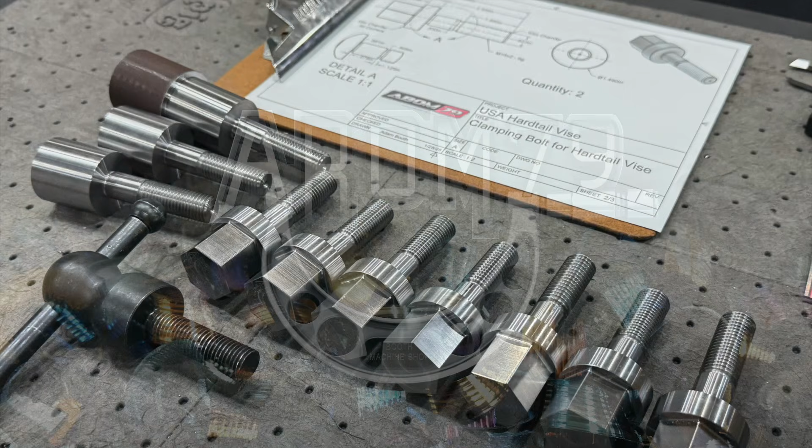We are in the new shop this week, and you can probably see that there's a little bit of change that's happened in here. We're going to talk about that. I want to give you guys some updates on things that's been going on around here, and things we're going to be looking forward to in the new year 2025.

I am also continuing to work on the USA made Hardtail Vise. Last week we were in the home shop using the shaper, working on the main vise body. And in that video, I had mentioned that I'm wanting to replace these guys right here - these are the factory clamp bolts that go into the Hardtail vise. And I'm working on my prototype replacements for these right here.

That's what I've been working on the past day or so, and I'm trying to get to a point where I feel comfortable with the program and making a good finished part before I move on to the actual finished product, which is what I want to get to. We're not going to be making the finished part in this video, but what I would like to share with you is the work that I've put into designing and machining the prototypes up to this point.

So I wanted to utilize my Miltronics CNC machines to make these for a couple different reasons. Every time I go into a part or a project like this, it's continuing my training with CAD and CAM, continuing my understanding, and each time I go in there and practice on Fusion 360, I learn a little bit more. And not only do I learn a little bit more, I remember things a little bit more each time. It's such a powerful software that there's so many things you can do with it. It's really hard to kind of go in there and just know all the capabilities of it.

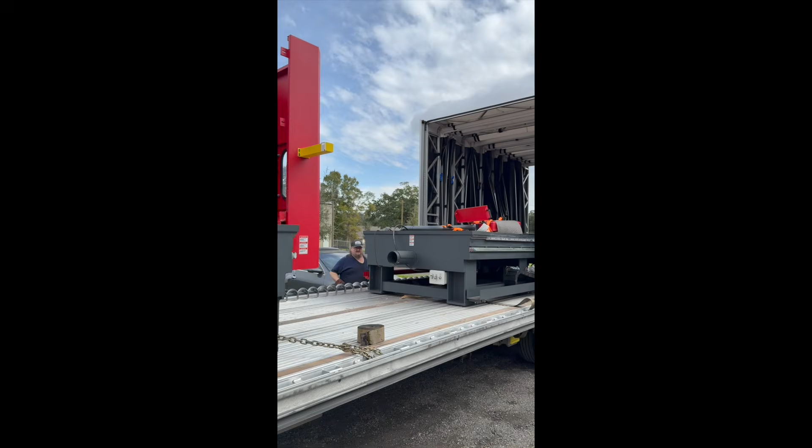But the cool thing is we're going to be replacing the Flex CNC with another machine. We're going to be putting another Flex in the shop, only this time instead of the 20-foot long bed, we're going to go with a 10-foot bed. That's going to clear up some floor space, which is a nice bonus since I'm limited on shop space, and the Flex is a big massive machine. It's really nice having that 20-foot bed if you've got work on full length materials, but I only had to use that a couple times for jobs over 10 feet, so I'm not really concerned about that.

So we're going to go with the 4-foot by 10-foot replacement machine. It'll probably sit in about the same place as the old machine. I requested the smaller coolant tank so it takes up a little less room on this end, which will give me more space back there where the forklift and other stuff is. I'll have space so I can hopefully add another machine in the future. I don't know what that machine will be yet, but I wanted the possibility of adding another mill or whatever. With the Flex that was in here, I just didn't have any more space except for maybe something small.

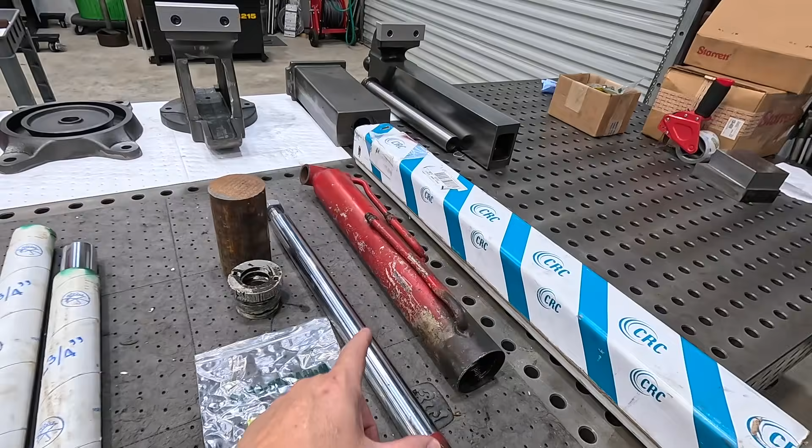All right, so I wanted to show you some upcoming work. We've got this hydraulic cylinder here in the shop - goes on a Mahindra tractor, for an outrigger. A couple things wrong with it: you have a rod gland that's completely chewed up, the threads are galled, coming out.

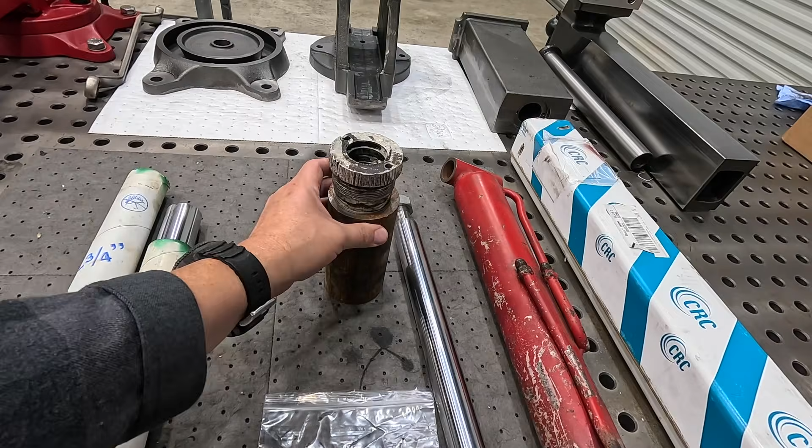So we're going to be replacing this, and I'm going to machine it from ductile iron instead of aluminum. We have some ductile for that, and I'm still waiting on the seals to come in - the material shipped, but they had to order one of the seals, so it should be here in another day or two. Once I have the rod gland machined and ready to go, we'll build it and put it back together. The barrel here - first thing we have to do is deal with that galled aluminum inside the threads, so we need to set this up in the lathe and chase those threads to clean them up, making sure our new gland screws into that barrel properly.

All right, so this is a job coming up. I did want to mention, because this is helpful, CRC Industries - luckily for me, they're local, over in Robertsdale, Alabama, less than an hour drive. They have all the materials for hydraulic cylinders, whether you need aluminum or ductile for pistons and rod glands, chrome plated rod, regular chrome rod, induction hard rod - they have all the honed ID tubing for pretty much any size hydraulic cylinder you can imagine. They have all the material, including all the soft parts you need, soft seals, everything.

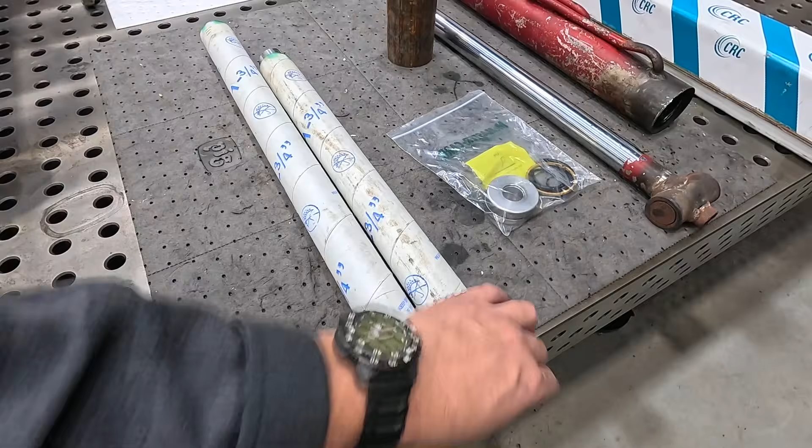They also sell drops - they have a drop shelf. These are a couple pieces I went ahead and added to the order because this is some really handy stuff to have around the shop. I use this a lot for projects and making parts, even customer parts. So if you guys need some material, this is 1045 steel - you can check with them because they have drops of all the different size rods they sell, and you can usually get it for a discount versus the regular cost of a full length rod. Good way to add some material if you need to in the shop. This is really good stuff to have. They had these two on the shelf, so I just added that to the order.

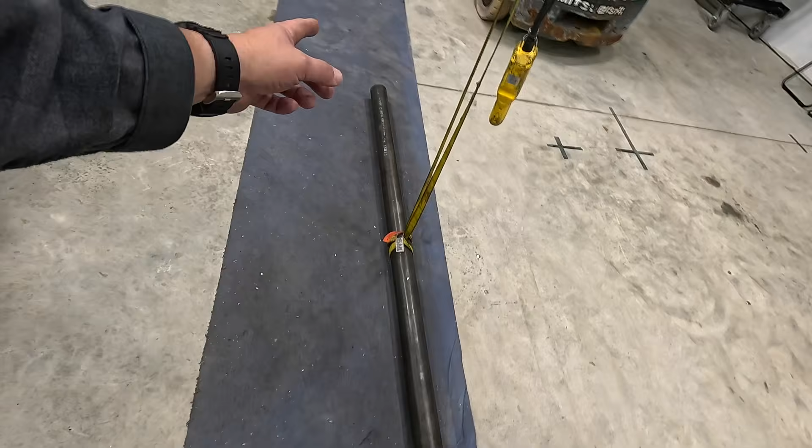This is going to be a mandrel for one of those paper cutting machines, and what we've got to do is turn it from end to end. There's a specific diameter it needs to be, and then each end is going to be turned and threaded for one of those bearing nuts, and the ends are counterbored for the bearing as well. They did provide a print for me to go on, so I have the dimensions there on an actual drawing provided by them. So this is going to be an upcoming project very soon.

We're probably going to get started on this next week, and we're going to be using the American Pacemaker to get this job done. So I figured you guys are going to like that—really nice manual lathe job right there.

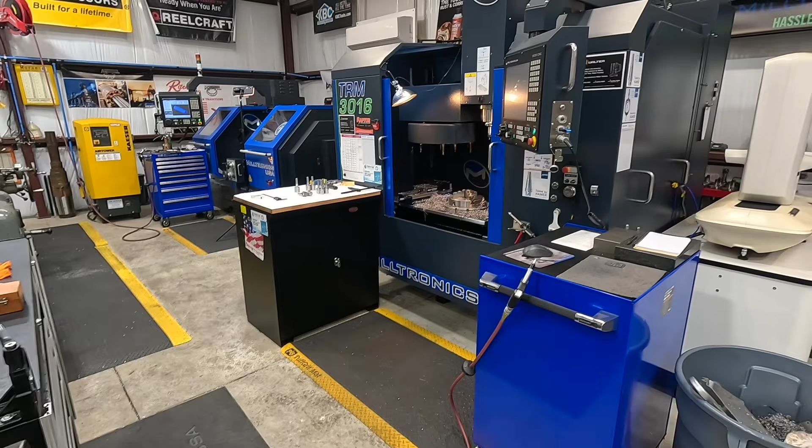All right, so we're going to move around here to the Miltronics. I have a little update I'd like to discuss with you on these guys as well. So about 3 years ago, when we first installed the Miltronics, I mentioned in that video that I partnered up with Miltronics.

They wanted to provide these machines, put them in the shop to help me and be a part of this journey of learning CNC and modern manufacturing. And that's exactly what they did, and they have been great to work with—just a great group of individuals up there at Miltronics, and I have absolutely enjoyed my partnership with them.

We are continuing that partnership, and what we're going to be doing is replacing the TRM 3016 with a VM 3018. So we're going to be going from a tool room mill to a full-on production mill, and I'm really excited about that. I have really enjoyed learning how to operate this mill right here, and this is an excellent machine for any machine shop out there, especially job shops like myself.

If you guys are running manual machines, manual mills, and you're looking to step into something that is fully enclosed with full CNC capabilities, this is an excellent mill—the TRM, the tool room mill. 30 by 16 is your travel there. But yeah, we're going to be replacing this with the 3018.

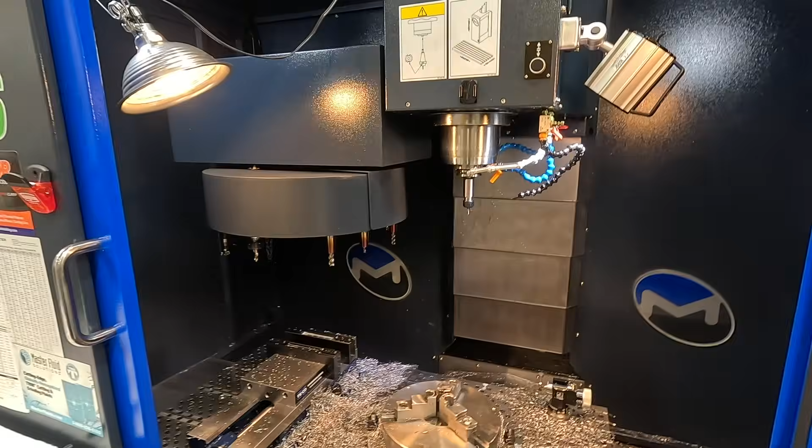That's going to allow me to have faster spindle speeds. We're going to have the side mount tool changer—I believe it holds 24 tools versus the 16 umbrella style. And because it's a full-on production machine, we'll have fast tool changes. It's got the swing arm tool change in there, and I believe a 10,000 RPM spindle.

It's going to have the through spindle coolant equipped with it. It will have the Renishaw probe, and it's going to have an auger on it as well. This one was not equipped with an auger, so I have to get in there and shovel all this out by hand. But the new one will have the chip auger, which I'm excited about, so we can turn that on to get the chips out of it.

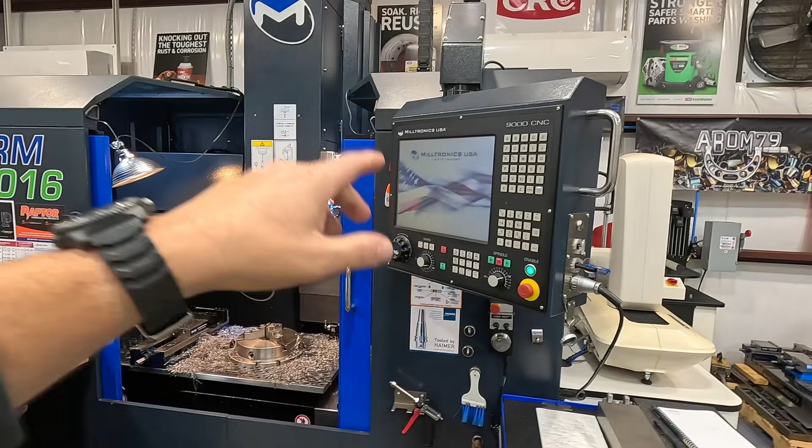The other cool thing about the new machine is that they have updated their controller. They just launched it last year at the IMTS show. Their new controller is called the Inspire, and the new machine is going to be equipped with the new software, the new controller. It's supposed to have a lot of benefits and updates, providing even better parts, better finishes, and more options on the controller and things like that. This is probably going to be later in the year as well, because they too have to build the machine—it's not ready yet.

We just talked about this recently and made the deal on it, and decided to go forward with it. So it could be March, April, May. I'm not really sure yet, but I'll let you guys know whenever that happens.

And this one is going to be going away, by the way. We're going to disconnect it and move it out of the way. It happened at a good time that the Flex is gone, because it's just going to make our job easier. We're going to move this one over and put the VM 3018 directly in its place right here. Then Milltronics is going to be taking this guy back.

What they told me is they're going to use this in one of their showrooms as a demo machine. So I am excited about that, and I'm looking forward to having the updated machining center in here to use, and hopefully that's going to help benefit me whenever I start working on these production parts, these ideas I have, to make something for you guys out there, a product that I can sell to you.

That's something I'm really excited about. All right, so I'm ready to jump into this project and show you where I'm at. I wanted to give y'all a demo of what I've been working on, getting this program and this part proven, and I think I have a good part now. Once I show this to you guys, I'm going to be moving on and hopefully making an actual finished part out of some different material. But let me show you where we're at with this, okay?

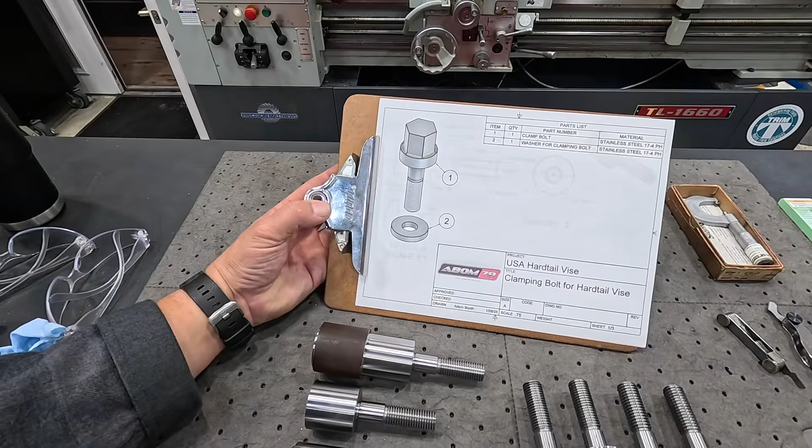So here's a few samples, and actually some finished parts right here. This is what I am making right here. I'm calling it the clamping bolt for the Hardtail Vise, and it is, again, going to be replacing this guy right here.

Now, there is absolutely nothing wrong with this. This is a good, solid design. Jason over at Fireball Tools has done an excellent job engineering this vise and all the parts he's put into it. So there's nothing wrong with a telescoping handle, okay?

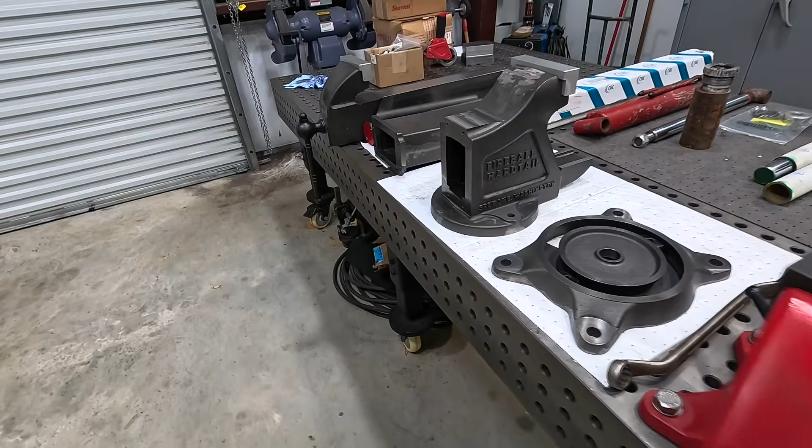What I was trying to do, what I would like to do, is continue making this vise right here a little more unique, a little bit more my own. This one is the Made in USA version.

Jason has somebody in the USA casting these and building them, and these are going to be available hopefully pretty soon on the website, where people can purchase them. But a while back, he sent me the castings for the USA made version so that I could machine it myself and put it together.

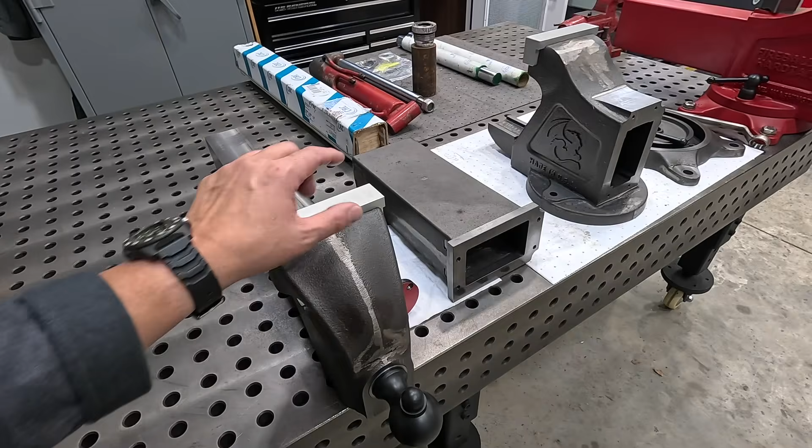And let me tell you, there's a lot of work that goes into machining these parts. I've got a whole playlist on the channel if you guys haven't seen it, machining every one of these castings so that it fits together.

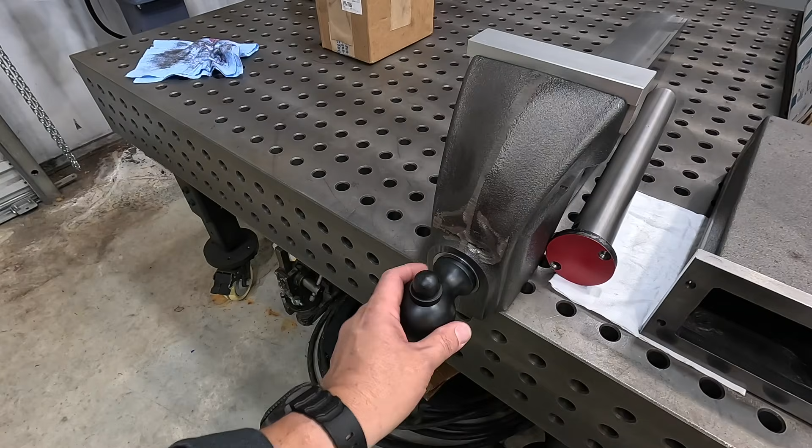But some extra things that I want to do to this vise: for one, we're going to be making our own clamping bolts, these guys right here. The other thing I would like to do is machine our own spindle, okay? We're going to just make our own spindle.

That's going to be some really good manual machine work. It's going to be good manual and CNC work, because I would like to replicate the meatball handle here on the end of the spindle, and I'd like to use the Milltronics to machine this part right here. But the Acme part of it, the thread, is going to be done on the manual lathe.

So this is going to be replaced. We're going to be replacing this guy right here. This is the nut. All right, so we're going to have a new nut to match the new threads that we're going to be putting on that spindle.

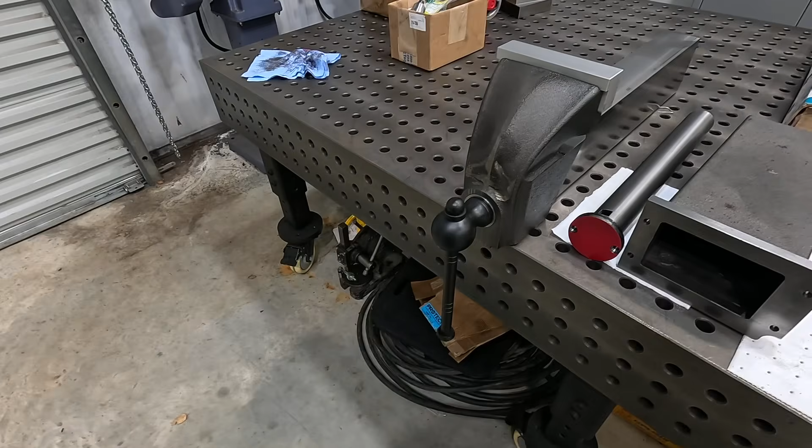So that's two big projects. And the other one was this guy right here. I want a hex head bolt on this that you can use a wrench to loosen and tighten. It's just personal preference, and that's what I'm going to be going with.

All right, let's go ahead and jump into our machining project for this week. And we'll start with the prints here. So these are some prints that I designed in Fusion 360.

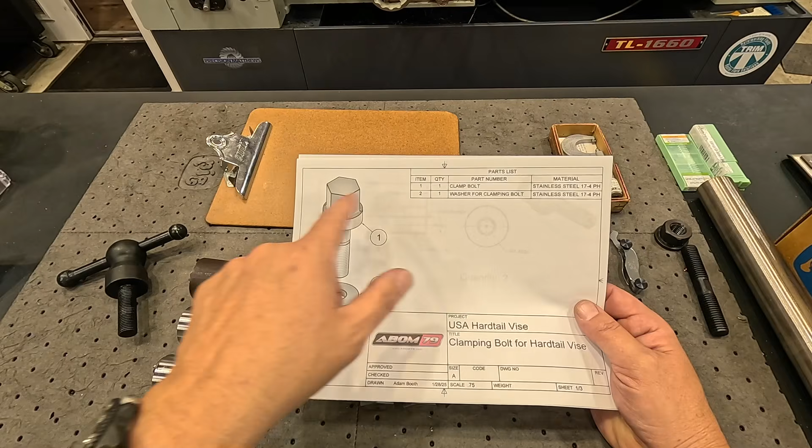I had a really good session with Kevin over at mechanicaladvantage.com, and he showed me some new techniques I hadn't seen before, where your first page is basically the part you're making, item 1 and item 2, the part number, material. So the finished part, once I make it, I'm planning on making mine out of stainless steel.

We're going to be using 17-4 precipitation hardened stainless steel. That's my personal preference, that's what I want to go on my USA Hardtail vise. We'll get into that kind of stuff later on, but for our prototype we're going to be using steel. So there was the first page.

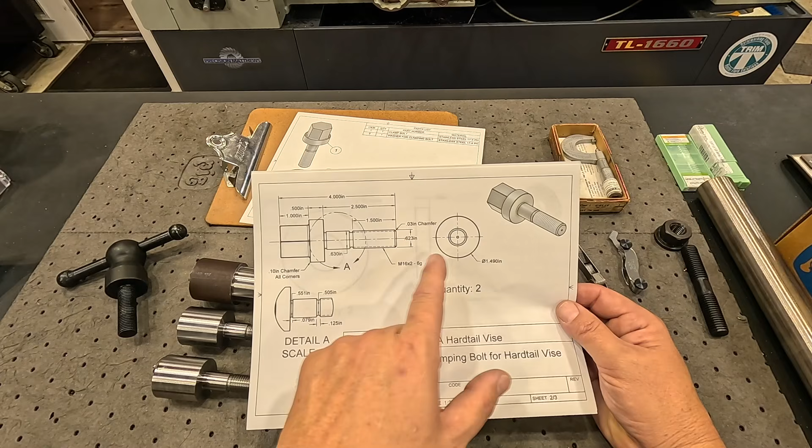There is the second print showing the specifics, mainly for the lathe work, and what it'll look like. This is metric, we got a metric thread, by the way, M16 by 2. And then we've got groove detail right there for the undercuts that I want to put in.

This is simply the washer that I want to go with it, a quarter inch thick, 16 millimeter bore, 1.5 inch OD, using the same material that we're going to be using to machine these. So there's our 3 prints right there on what we're going to be making.

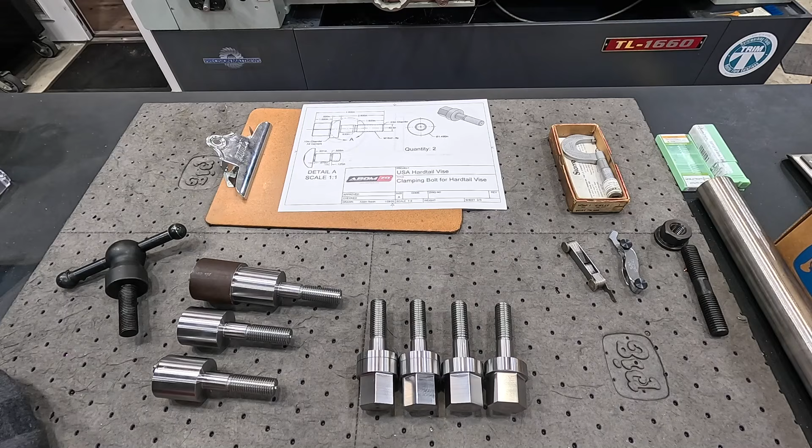These are the prototypes I've been working on, and the reason I have so many is because it's difficult to just make one part over on the CNC. It's not difficult to make the part, but whenever you're trying to tweak your program, if you have to make changes on diameters, finishes, maybe something's cut in the wrong place, it's better to just go ahead and make another one, or have another piece you can put in the machine and turn and mill another one.

And that's what I've been doing. I've got some more over there, and once I got things dialed in to where I want, it was real easy just to keep going and keep making a few more parts so I would have some extras to put in the machine and work on. So that's exactly what I'm doing.

These were the first 2 that I machined right here. Now the threads on these guys I did over on the Precision Matthews lathe. I did this manually - turned it, put the thread relief in there, threaded it. But I did something that I've always taught you guys.

I did something I've tried to correct other people in doing - I went ahead and took this bolt right here, the regular clamping bolt, and I don't have my calipers. Let me go grab them. All right, I had the calipers over on the machine.

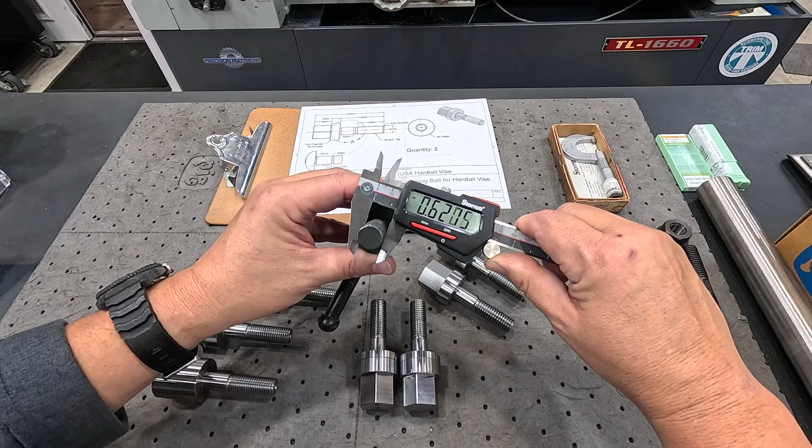So what I was getting at was, whenever I took these out of the vise, I've always looked at that and just figured that's 5/8. You can just look at it and kind of tell the size. And when I measured it, let me show you - you're getting 621, sometimes you get 620, just depending on where you measure it at. And I took that and said, okay, that's 5/8. That's all I did.

I've always taught you guys to verify your thread pitch using a thread pitch gauge right here, okay? I never did that - I assumed that was 5/8. I went ahead and turned my very first one, actually turned 2 of them, turned and threaded for 5/8-11 UNC. Beautiful threads, right on size.

We got a 5/8 flange nut right there, you can see, goes on there nice. But I never could get it to screw into the nuts over on the vise. After a couple tries, even chasing the thread and taking a couple thou off the pitch diameter, it still wouldn't go. I said, I think I know what's going on. I went ahead and grabbed the thread pitch gauge on the 11, and it doesn't fit. So what does that tell you?

You have a metric thread. So 2.0 fits on there right. So I made a mistake and turned these 5/8 when they should have been turned 16 by 2. All right, so another learning lesson right there.

I've told you guys plenty of times, always verify your thread pitch whenever you're machining these on a lathe before you make a part. Now this is no big deal for me because this is just a prototype, a sample part. But if you did this to a customer part, you're eating your labor and material costs and all that kind of stuff. So just prevent that by having these inexpensive tools in your toolbox and verifying your thread pitch. All right, there's today's lesson anyway.

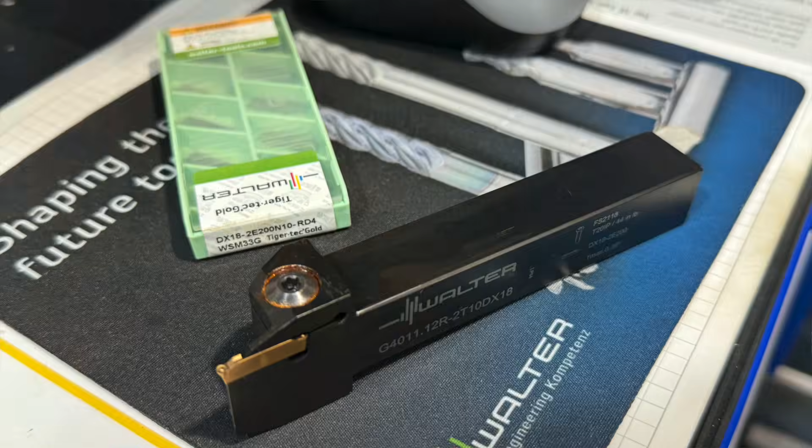I also added the corner radius down in here. I didn't have the tool that I needed for the CNC lathe, so I went ahead and got one from Walter, and it's a 2 millimeter wide full nose radius insert. So I was able to modify it.

You can see this one right here does not have the corner radius down in there. So I made several of them without the corner radius, and then once I got that tool installed, I was able to add that to the program and get it proven so that we didn't run into this face right here and cut that little undercut on there as well.

All right, so that's where we're at. And then once it's turned into this part right here, then I go to the CNC mill, drop it in our 3-jaw chuck, and I've got a program where it's going to machine the hex. It's going to deck the top of it, chamfer it, engrave my logo, and it's pretty much a finished part at that point right there.

All right, so I think that about covers everything. I will go ahead and screw one of these in so you can see what this looks like compared to the factory handle. And then let's cut a couple more of these guys and show you how the program is working on the CNC machines.

All right, want to show you what these are going to look like. So we're on our hardtail, and just so everyone's aware, this is the made in Taiwan version of the Hardtail Vise, okay? Where that one is the made in USA castings that we've been working on. So if you guys buy one, this is what you're going to get right now, okay?

And absolutely nothing wrong with anything on this vise right here. Fireball Tools has some excellent videos on their YouTube and their website showing the torture test that they put this vise through compared to other well-known vises like Wilton, Reed, and all the other popular ones out there, and how well these guys perform under the stress loads.

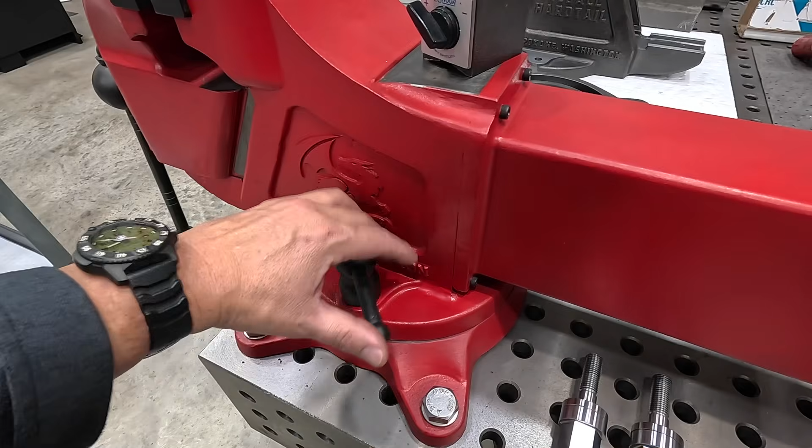All right, so here is the original handle. Takes a little bit to unscrew it. Let's go ahead and pull this one out. All right, that one out. And we take one of our samples.

Just like that right there. See, I went with stainless steel bolts, and I wanted this to be stainless steel as well, just to give it a really interesting contrast. I personally like it, it's just a personal preference, guys. Just like these bolts here on mine, the USA version, these are stainless back here. But that's it, that is what I'm going for right there. I like it, I think it looks good, and this is what we're gonna have on our USA casting right there.

So let's go to the machines. We're gonna start with the lathe work, and then we'll get those turned, and then we'll go to the milling machine and mill the hex. This is that material I've been using to make the sample parts, just some cold rolled 1018 steel that my friend Blake gave me a bunch of. I'm gonna go ahead and take this and cut it in half so it's not as long, and we'll be using this to make some more sample parts.

All right, we're ready to go into the ML16 with our stock, and got all the tools loaded up. Everything is on size, I've got everything working really well, and we're gonna be using our tailstock for this job as well. I didn't want to do any turning and threading on that 16 millimeter shank without any kind of support. It's just too much stick out there, and I think we need the support of the live center.

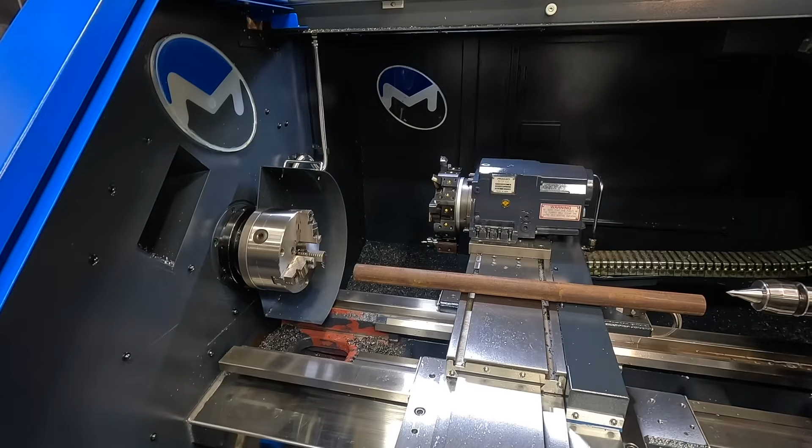As I mentioned, going in here and doing this work over and over again, repetitive, is continuing to teach me and improve how to use these machines and what I need to do. For example, the tailstock, I've got this really nice extended nose live center, and I've got the quill almost all the way out, 5.5 inches, and that's what it takes to clear this carriage and make sure our tools and everything clear there as well. So let's get this loaded up and start making some chips.

Bandsaw cut side, I want to make sure I started with that.

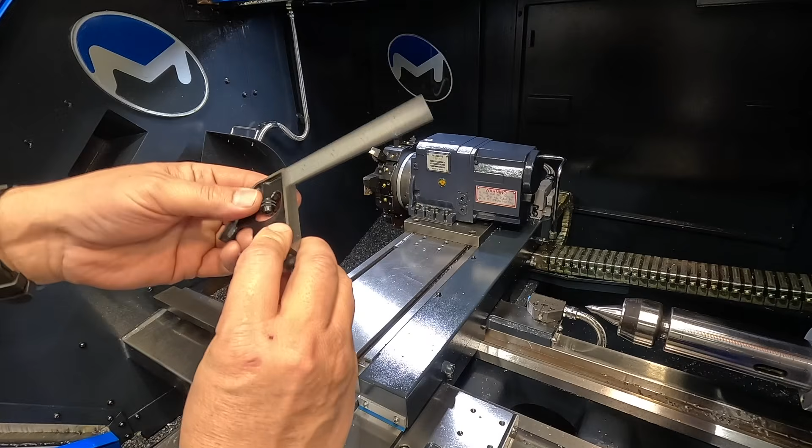All right, so to get my Z0 position, I'm using my Starrett small combination square. I've got it set to where I need to, and I just come up here and do this with the stock and get it nicely butted up to the square and the first face of that jaw right here. Once I have that, I tighten it up and it's where it needs to be, and it'll face off 10 to 15 thousandths, depending on how far out that is from where I tighten it up at. I usually just do another check with it, and I can tell you got a few thousandths clearance between the rule and the jaw, so it's going to take probably 15 thousandths off that face to start. We'll start you out with the wide angle there.

I will get in here to get you some better detailed shots of the cut, but let's just start here. So, order of operations: face it, center drill it. We'll stop the program, I'm going to bring the tailstock up to support it, and then we'll continue on the program. It'll be rough turned, it'll be finish turned. I have two separate grooving tools to put the thread relief undercut and the shoulder undercut in there, two separate tools to do that. Then thread it, and the last thing is the parting tool to part it off. Once it parts down to the small nub, we'll come in here, move the tailstock, reach in here and break it off, okay? Close the guard, and we are ready to hit cycle start.

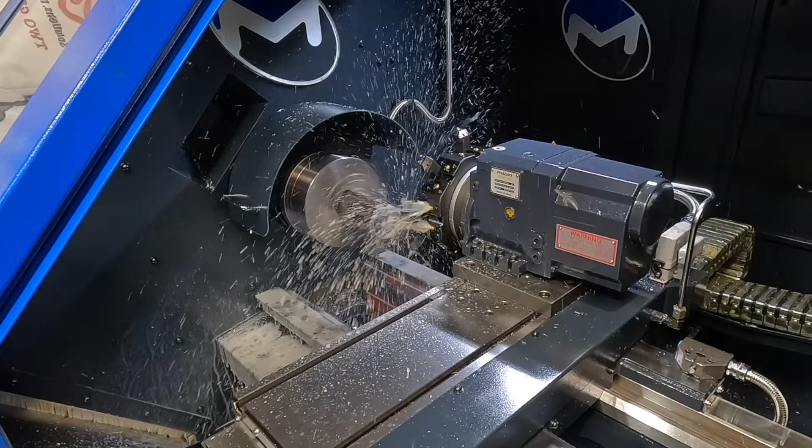I usually bring it in nice and slow just to make sure that I am in the right Z position. Face it. All right, I got an optional stop going. It's going to be our center drill. I'm using a peck cycle on that center drill just to take it nice and easy, make sure it doesn't come in there and just snap the tip of that center drill off.

All right, so this is where what I've got to do is I'm going to go cycle start to go to the next. It's going to bring our turning tool back up. What I've got to do is let it do the tool change and then bring this carriage back up to where it needs to start cutting before I can bring the tailstock in. Otherwise, this is too far back.

So I just bring it in nice and slow. And then right there, where it's going to come in to start cutting, I stop the spindle. Then I'm going to reach back here. I've got it pushed way back. Let me come around here, and I got to come from the back side. Push this forward. All right, this is the kind of stuff that all made me super nervous going into this job. When you're cutting down to a small diameter like that, I keep feeling like this right here is all going to hit. But I've learned that there is clearance here. It's not going to hit the tool turret. All right, so we come up here.

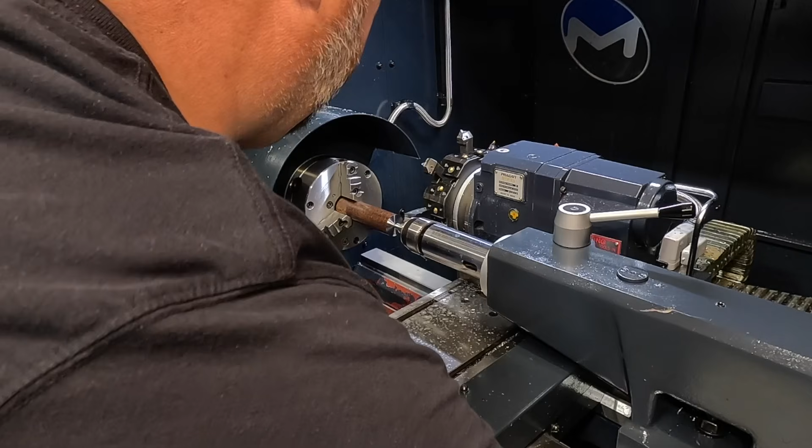All right, lock it in the back. And I don't put a ton of pressure on this. Matter of fact, I back off and I just run it in with the hand wheel just until it touches, lock it, and now we're ready to continue on.

So all I have to do at this point is just turn on the spindle again, forward direction, turn back on the coolant, and then the rapid button, I've got it down on 0. We're going to go up to 100%. Now it's going to start roughing it in.

So I do have the max RPM for the turning set at 3,000 RPM. I'm not comfortable spinning this thing up super fast, so I kind of limit it to 3,000. When I'm doing the grooving, I've got it set to 1,000 RPM. These chips are flying back here hitting me.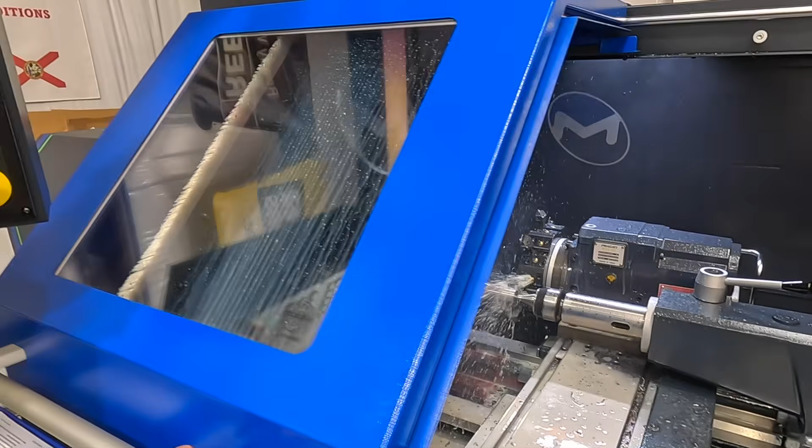And when I'm doing this roughing here, a lot of times I come up here, you can see our 3D image of it. I've been going up an extra 10% on the feed while it's just roughing that in. Slinging chips at me. And we got it maxed out at 3,000 RPM.

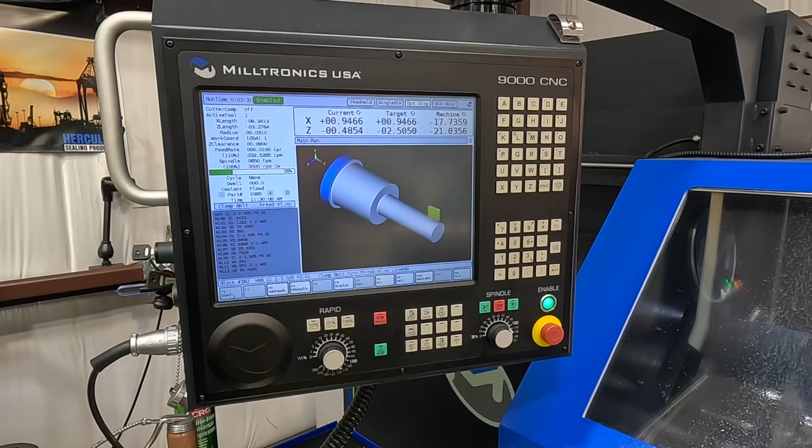All right, now that we're down underneath that 1-inch diameter, we'll bring this back down to the 100%. That's the last roughing pass. It's going to make one more roughing pass actually. Cut that chamfer and take the last few thou off of it. All right, here's your finish pass. Just taking 10 thousandths off of that, all of the diameters here, 5 thousandths off of the shoulder face.

All right, cycle start. Now we're going to be going to our groove. So the first one is going to be the undercut for the threads. Rough it out, finish it, chamfer both corners. Just that quick and easy, all right? That is a 3/32 wide full radius tool. The Walter MX22 is the tool.

All right, the next one, we're gonna be going to that new 2mm wide grooving tool so we can get into that shoulder. All right, I'm gonna slow this down 50%. You see that movement right there? That's what you have to sneak up on and get comfortable with it doing. Otherwise, you think it's just gonna crash and wreck and tear the machine up and tear your tools up, but it works. We've got a beautiful undercut in that corner right there.

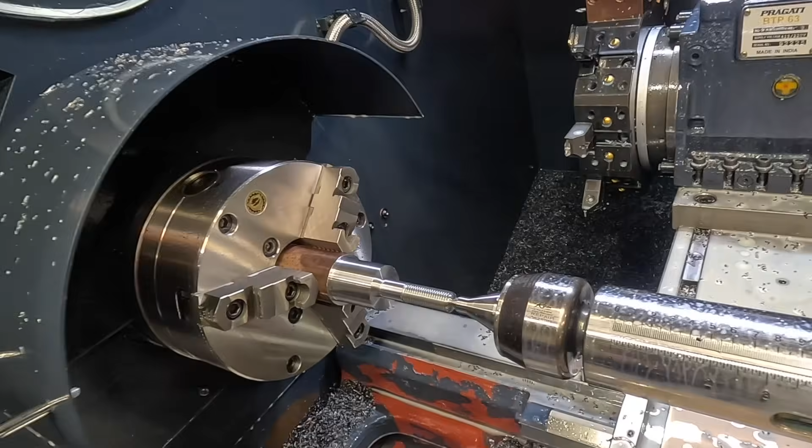Like I said, that 2mm wide grooving tool to get to that shoulder, I had to play with it because it was trying to hit the face. It was trying to cut the face. We made some changes to the program so that it didn't come straight in that way. It actually comes in from the side and cuts that out, and actually cuts a little bit of a chamfer on that too. So it was cool modifying it to get to just every little thing you can do to improve that is wonderful.

All right, so last thing we're going to do is do the parting tool, and hopefully it's going to work out the way I told you that it would. So let's start spindle, cycle start. We're going to this is our Tungaloy parting tool. I've got it going with a sort of a peck cycle also. It goes in 100 thousandths, breaks the chip, and then continues on. It just keeps doing that.

All right, and that's it. So that's the end of the cycle right there.

Everything looks good. We can go ahead and loosen our tailstock, slide this back out of the way. Now we come in here and break this off. This is a safety switch too, by the way - if that guard is open, there's a switch back there and it won't let the machine operate. Just a good safety feature.

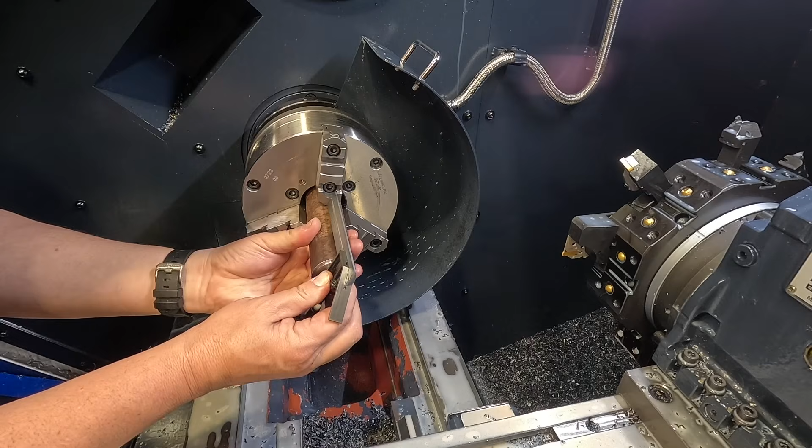Grab the combination square here and just try to get it close. Like that. Snug it, and then I check it just to be sure. That looks good right there. And then we'll retorque it. Close the guard, and we are ready to machine.

All right, face it off. And we're going to go to our center drill.

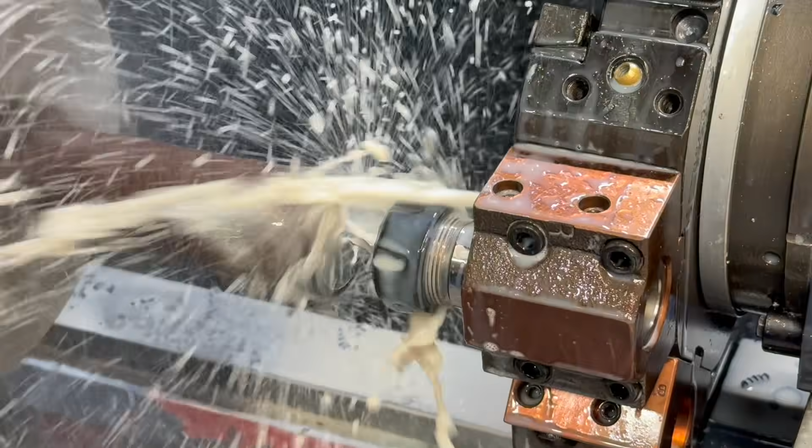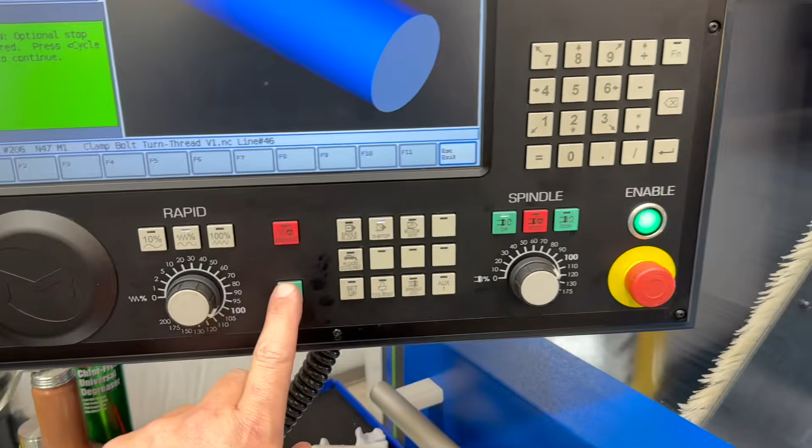All right, we need to go ahead - this is where we need to bring our turning tool around and bring it up to where we're going to start cutting. Right there. Bring it down to zero to stop it. Stop spindle. And now I'm just going to bring our tailstock in. Okay, our tailstock is in. We are ready to turn. First thing we'll do is just start spindle.

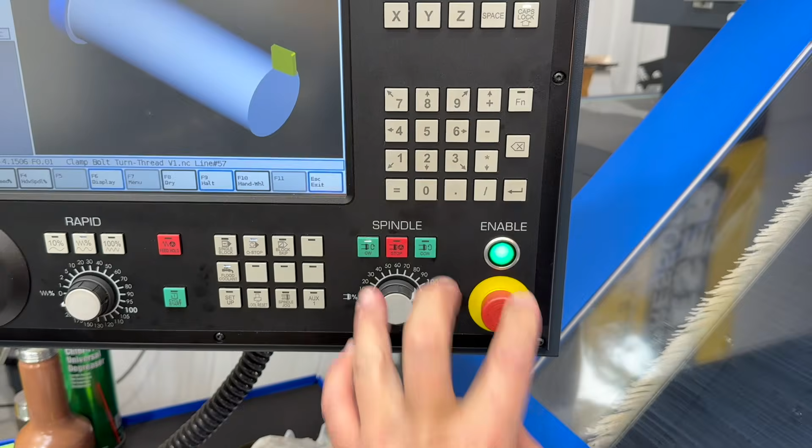And then bring our rapid up. It's slinging chips straight out this way, and they're like little hornets that hit you, so it's hard to get in here by hand to hold this.

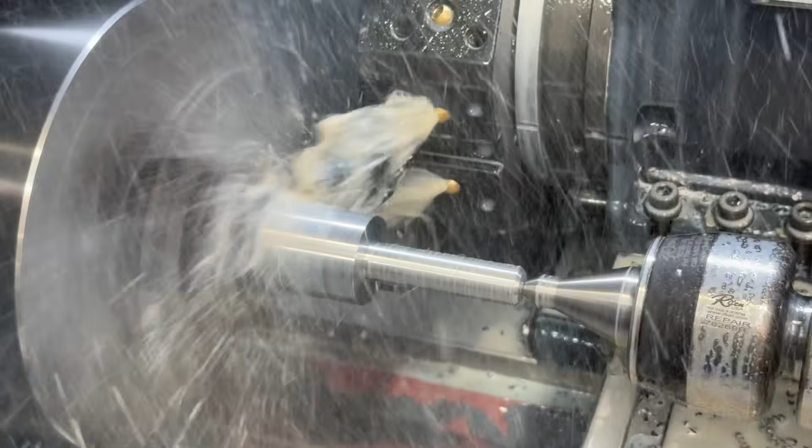Ready for a tool change and then go on to the grooves. All right, so for the next couple ops, I think I'm going to disengage the coolant so we can get in there and show you guys a little bit better detail of what it looks like. I'm also going to slow it down so you can see the movement of the tool.

All right, so let me go ahead and drop that down. Cycle start. Turn the coolant off. Let me slow this down. I'll tell you what.

So this is an adaptive grooving tool path that Kevin taught me about. It just comes in and goes like that. Whatever depth you have it set at, I think I have mine set at 15 thousandths per pass. Cut the groove, make a finish, and then it's going to chamfer it.

Chamfer. All right, now we're going to swap to our 2mm wide grooving tool. This one I'm going to slow down as well so you can see the approach. Up, coolant off. That groove cycle is going straight in, but it's like a peck. And it's going to chamfer the corner right here - just break that corner off.

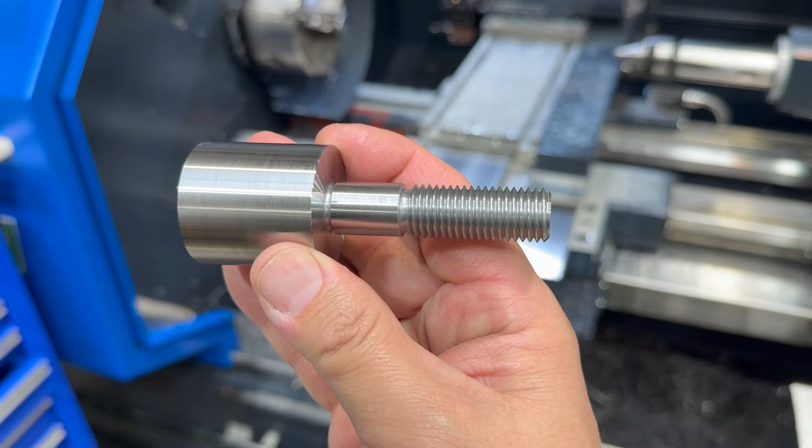I've made many changes on the program to try to improve every bit of this, from having a larger chamfer here on the end for the thread, better finish on the thread, breaking the corners for the grooves right there, and even on that shoulder, that little undercut in the shoulder, it was leaving a sharp burr there, and I was able to add a small chamfer pass to break that edge off, to eliminate having to do it manually with a file or something like that. But there we go. Now we are ready to take this to the CNC mill to finish it.

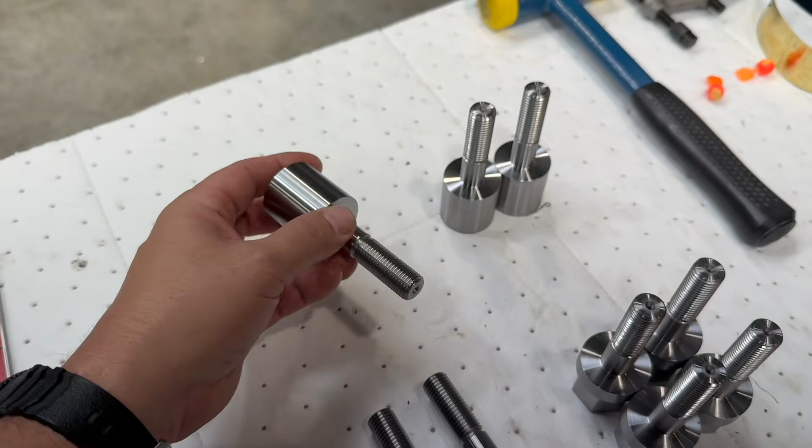All right, this is our setup for the milling machine. These are the two that we just turned, that you just saw me turn. These are some that I've already done previously, that I was working on the last couple of days. This one is one that's left where I actually, after I added the shoulder radius in there, the 2 millimeter wide groove, these two are what's left from before I added that shoulder groove in there.

You can see there's a burr hanging off that thread. That's another reason why I was reaching in there and filing it, just to kind of knock any of those burrs off while it's still in the lathe there. And these are some that we've already got milled and finished. You can see there's not a corner radius down in that bottom, and then these do. There's one that you can see how I touched the face with the grooving tool there.

So it's little tweaks like that that I'm always having to make. You know, if you do that and you mess a part up, it means you got to make another one, right? So that's why I make so many of them, because I make one and I make an adjustment as needed and then make another one. But it's, you know, it's just good. The material I'm using was free, and this has given me lots of training and practice, and it just helps me out. That one looks really nice right there.

All right, so let's go ahead and we'll get one loaded up and start our milling. Okay, into the mill we go.

So the top of this jaw is my Z0. So in the program, this face right here, we're working the top side of that. So I just drop it in, make sure the chips are off of it, drop it in, snug the 3-jaw up. It doesn't have to be super tight. I take the soft blow and give it one good tap like that, and now we are ready to machine.

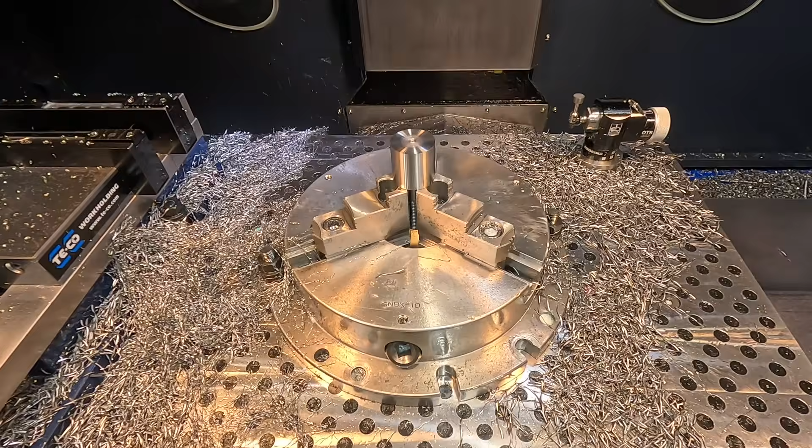All right, let's get going. We'll start off with a nice wide shot so we can kind of discuss things and see what's happening as we do it. Cycle start. We'll do a tool change to tool number 4, which is going to be our 4-flute 1/2-inch end mill.

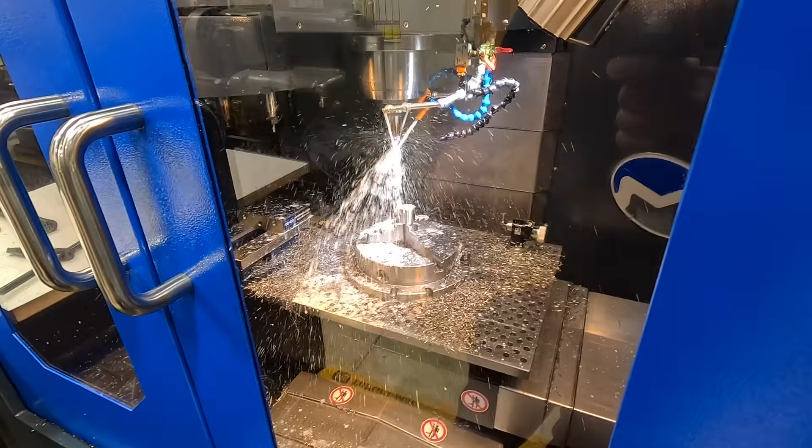Going to go around it. We got some really nice graphics up here so you can see what's happening. Cut it round, then it's going to come back and do the adaptive for the hex.

This is going to be the finish pass here.

All right, what I've been doing, see those chips build up? I've been turning the air on. It's helping to blow those out of the way. See that? It's basically just making a spring pass there.

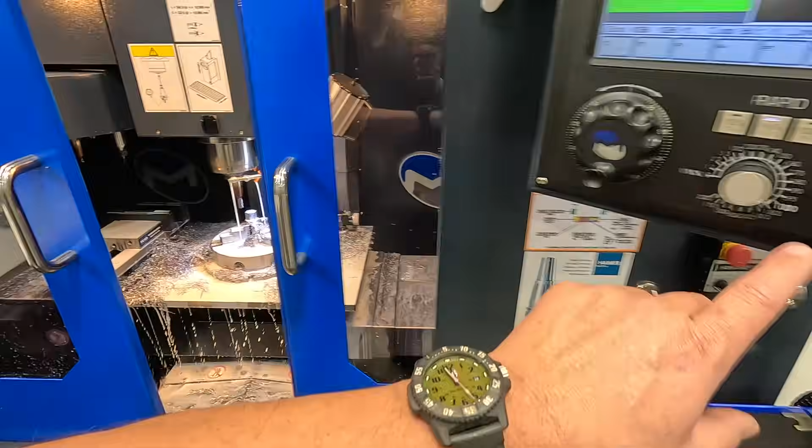All right, we're going to do a tool change to our TungForce-Rec end mill. There you go, that guy right there, 1/2 inch diameter, 3 inserts.

That's it, it's finished. Let's see if you guys can see this. I'm just gonna stop the spindle there before we continue on. Just got a beautiful finish on the top of that using that end mill there. After this one, I'll get you some tighter shots with my other camera.

1/4 inch diameter chamfer mill. Got a 10 thou chamfer on the top.

All right, and then now we're going to go to our engraving tool. That's this guy right there. Running 8,000 RPM, which is maxed out on the TRM. I am going to be running air with that.

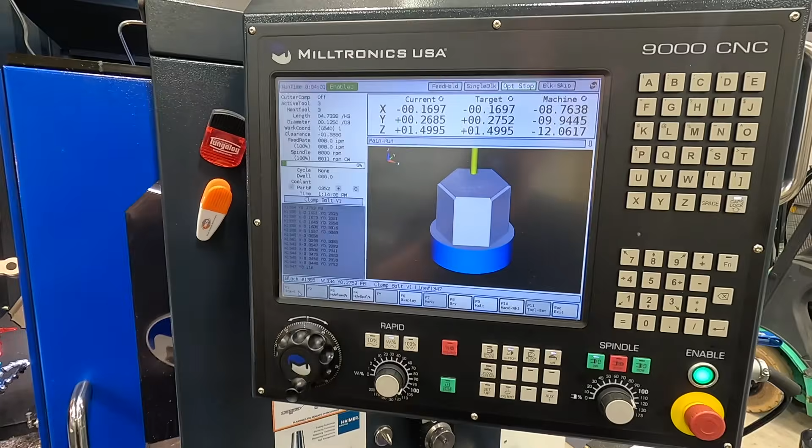You can kind of see it on the graphic stuff here. Let's see if we can tilt this down a little bit. It's just really hard to see, but the chamfer tool isn't defined very well. That's why it kind of looks a little goofy on the graphics there.

Should be just about towards the end. All right, there it is right there. There it is. I love it.

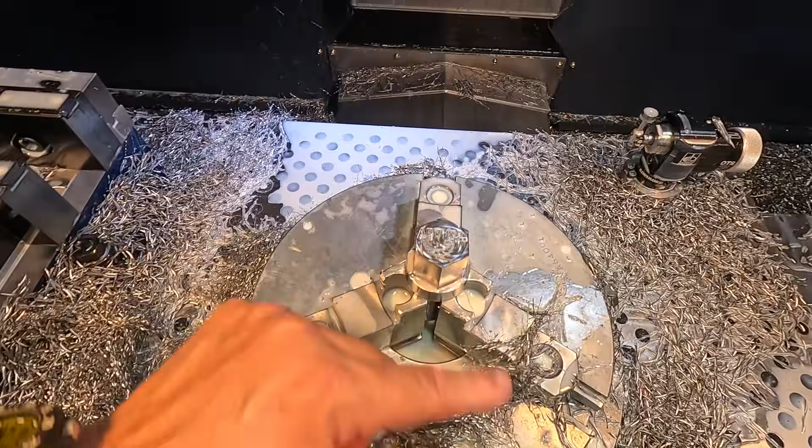Beautiful. I'm excited to see what these machine finishes are going to look like on something better, like our stainless steel, or maybe even a piece of 4140. But I think that looks great right there.

So just like on the lathe, you know, it took several of these to get this right. I would make a finish on there, and I didn't like it. On some of them, all I would do is just bring the Z coordinate down about 5 thousandths and recut it until I was getting the consistency that I wanted with both the facing tool and the grooving tool there. And I've got it to where I think it looks really good.

So we'll go ahead and take it out. And that is a finished part, with the exception of one chamfer that we still need to put on it.

That's this guy right here. I just do not have a tool. I don't have the proper tool here that I need to be able to get down there and chamfer that edge. So that might be something that we improve on later.

But for now, I'm just going to put this in the manual lathe, and I'll have a tool and come up and just knock that edge off about 10 thousandths.

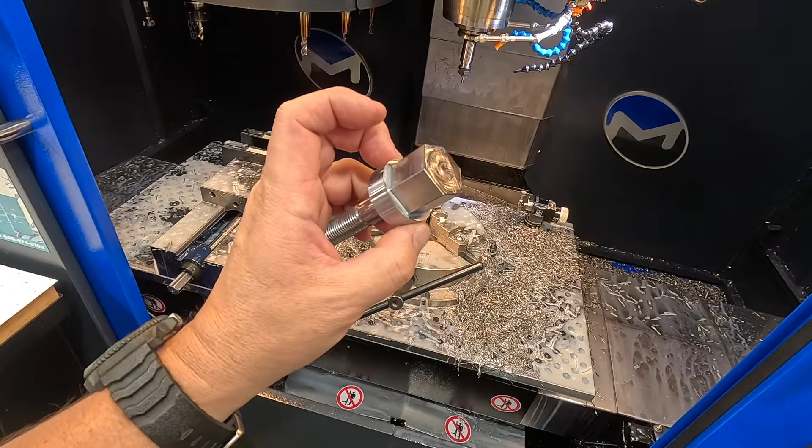But there we go. So we've got, this is the other one that we just turned. So we'll go ahead and get the chips wiped off of here, get it loaded up, get it machined, and see if I can get you some better footage of the next one. We are loaded and ready to start.

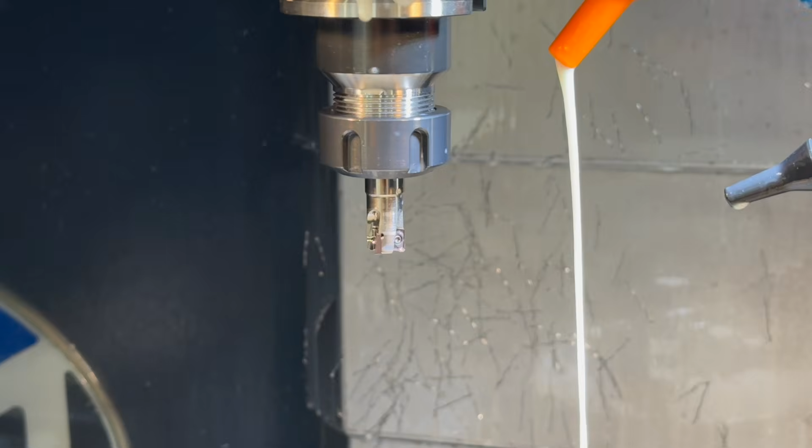A little better look at that finish up there.

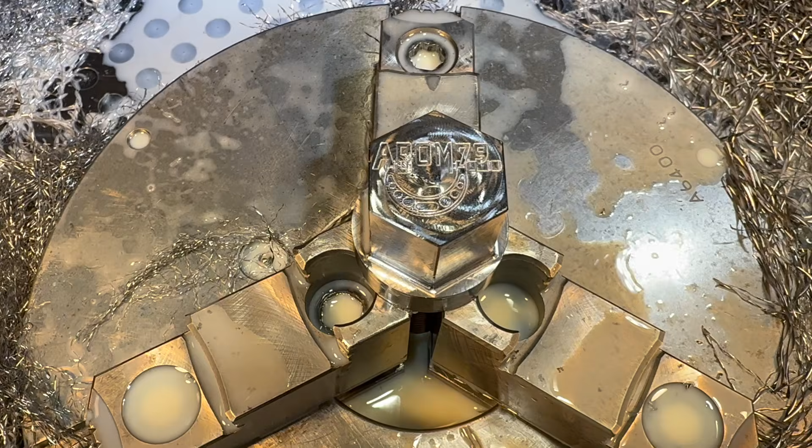All right, well, there it is. Is it gonna focus? What do you guys think?

So one thing that, you know, anytime you're taking, I hate how that camera does that. It tries to jump from one thing to another, and I wish it wouldn't do that. But one thing that I've learned a long time ago is that the pictures and videos on a freshly machined surface like that can really skew it and make it look worse than it really is. I mean, that's actually a beautiful finish on there, but some people may look at that and say, I don't think so, but it really is. That is a nice finish on there. It's got a nice slick, smooth feel to it, and I liked our depth in the engraving. Worked out good.

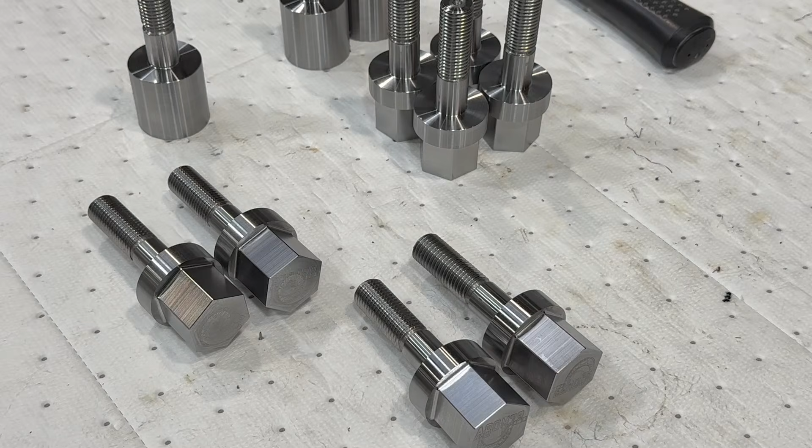All right, so these are the two that we just machined right here. You can barely see the chuck marks on there, but that is on there. As I said, we do need to come and cut a chamfer on that edge right there, and we'll do that last. But I really like that. I think the TungForce-Rec is leaving a nice finish on there, and our engraving tool is doing a really good job. Here's the second one right here.

Well, there we have it. Remember, these are being machined out of some 1018 steel, soft gummy steel. So it's going to be nice to actually machine in some good hardened material and see how much better we can get these to look. All right, there's those two there. So I still have some of these others that haven't been machined yet. So I think I'd like to go ahead and put one more in there and see if we can get one more good cycle of videos of the machining of the hex on one, okay?

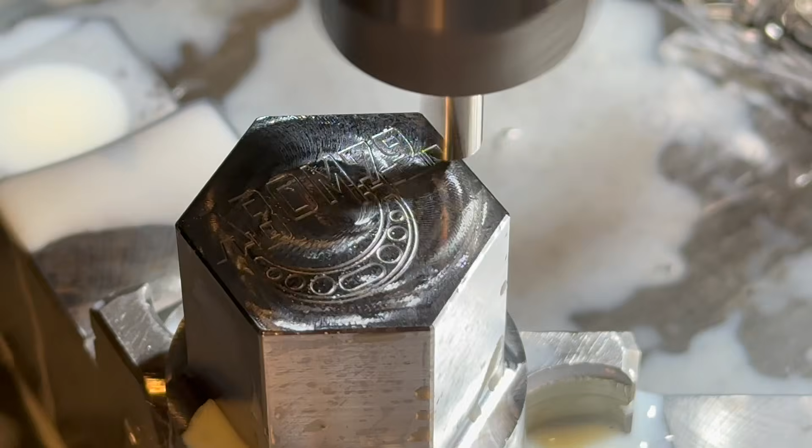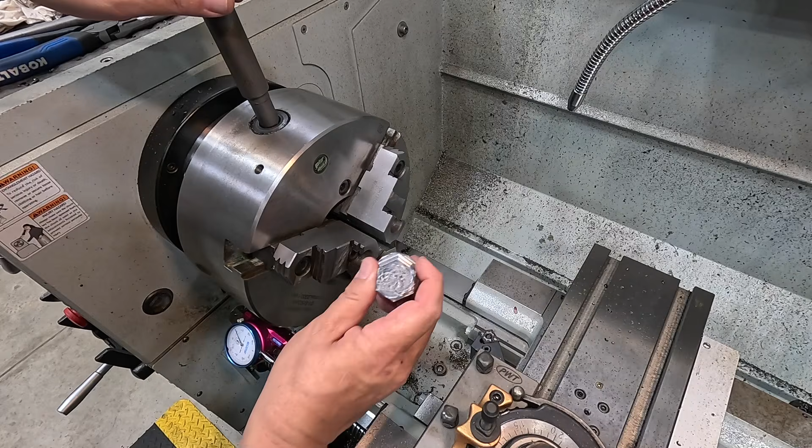All right, now that we've got all the CNC machining done, we're set up on the manual lathe here just for this last step of breaking this corner off. I got a 10 thousandths chamfer I'd like to put on that. So this is my setup right here. We're using the CNMG tool. We're using the 100-degree corner, should I say. Pretty simple. And I got a dial indicator down here set to a 0 where it first touches.

So just bring it into the face, clamp it lightly, and we'll turn it on. Tool shouldn't hit, tip of the tool anyway. I was trying to get as far as I could. All right, and then got this indicator down here. Once it touches that edge, it should be right there on 0. So bring it up, and it should be right there on it. And I just go another 10 or 12 thou, just like that. Don't move the cross slide, just bring it back.

Careful taking it out, and then there's your corner break on it. Simple as that. So I got the 3 that you just saw me machine, and I got 2 more over here that I haven't chamfered yet, so we'll do 5 of them.

I have the DRO set to a 0 in our X, so it shouldn't hit. So once you get in a rhythm here, if you got several of them, you can just bring it on up, chamfer it, move it back.

I would like to see if I can get this going in the CNC. I'm sure it's easily done. The pros that know how to do that stuff already probably have plenty of solutions for that, but this was just the simplest thing for me to do.

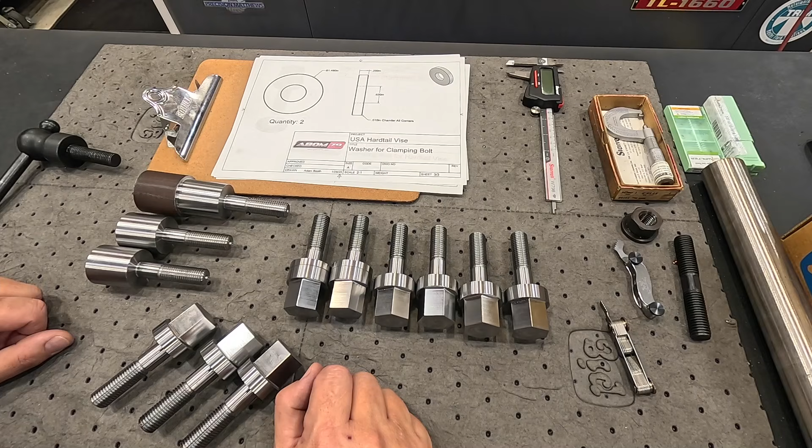So this right here, you know, we still need to machine some of those. I haven't even done a program for this one yet. The first 2 that I made, I just did it manually over there on the manual lathe. But I would like to work on writing a simple program to be able to do this over on the CNC lathe there as well. Get them face drilled, parted off, and then probably set them back up for a second op to face off the other side nice and clean. But that'll be a separate video project, whatever.

I've already got 2 of them made, as I said. These 2 right here. Got nice finishes on them. Got both sides faced off, 1/4 inch thick, matches the OD. So we'll take a couple of these that we just machined and go ahead and put them on there.

There we go. How about we go put them in the Hardtail Vise and see what they're going to look like.

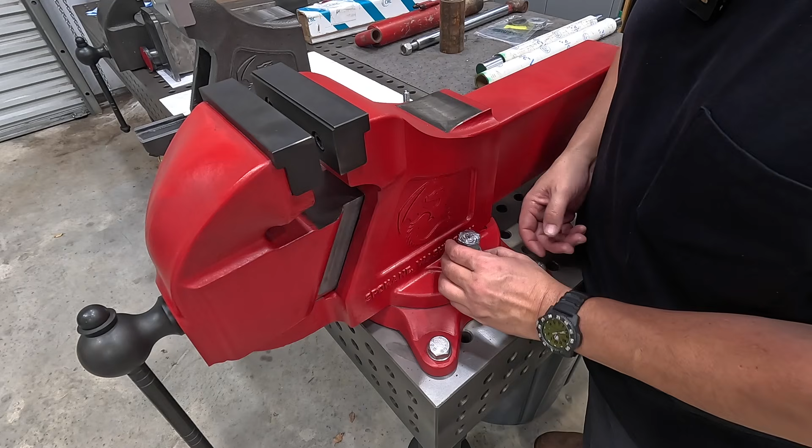We'll go in the finished Hardtail Vise right here so you guys can see what they're going to look like, because this is what I was talking about earlier, as in some things that I might consider machining or making and selling to other people. Once I get this program figured out and get the material to finish this, I'm going to use stainless for mine. We may end up making some pairs of these to sell to others if there's any interest, maybe consider a small batch of them or something like that.

But see, I like that. This is the look I was going for right there. I've got the stainless steel bolts holding it down to the table, and I wanted these stainless steel as well on my vise, so I'm liking that. Now the only issue with the engraving is that you never know where the orientation is going to end up after you get it on there, but no big deal. At least it's got my logo in there. Let's put one in the other side.

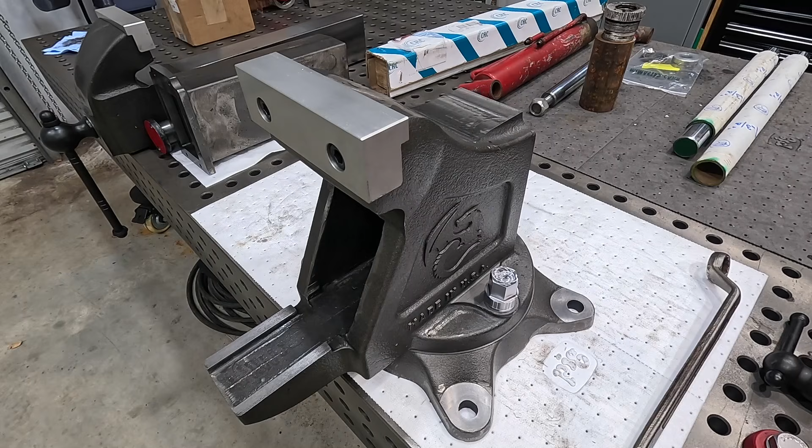So what do you guys think? You dig it, or would you rather have the original handle on there? I think it's just down to personal preference. I know that this is much more convenient. If you're in a fast-paced shop, a working shop where you're using a vise constantly all day, you may not want a wrench on there to loosen this up, you may just want to keep that on there.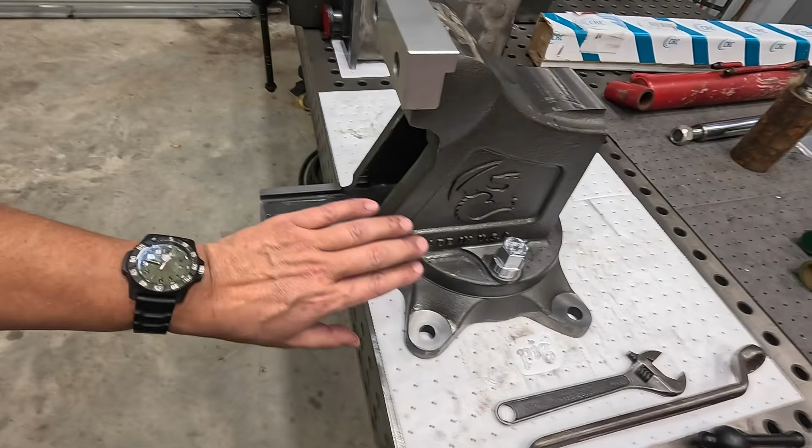But for me, for our special edition Hardtail vise, the USA version, we're going to be going with these machined from Abom79, only they're going to be 17-4 stainless steel. But I'm liking it, really do like that look. So real happy with the outcome on this. It's really coming together and looking nice, and I'm excited to see the finished result once we get all this stuff finished.

We still got to make our custom spindle, make our custom nut for it, and once we get those done, I think the machining and building of it will be about complete. From that point, it'll be whatever kind of finish we're going to put on there, and I still haven't even decided that yet. But really loving these guys right here.

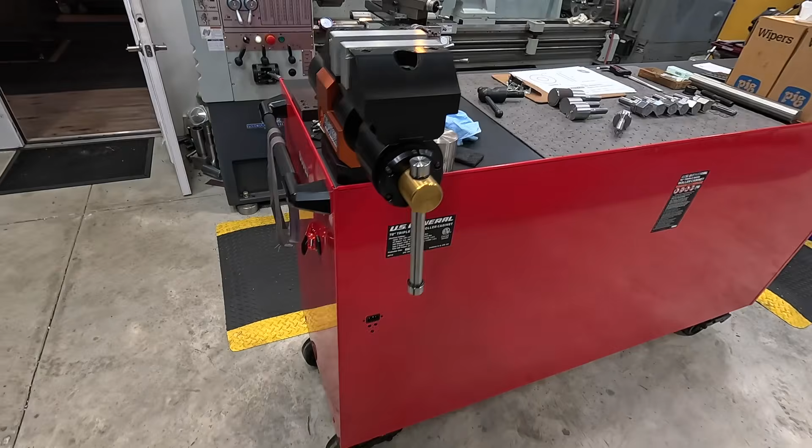So something I wanted to mention was I've got a bunch of these samples right here. I'm going to keep one or two for my little knick-knack table, stuff that I've made. But I've got about another 8 or 10 of these over there that I still need to machine, including these guys. I thought it might be nice to offer up some of these extras to anybody out there that's interested. I've been kind of playing it through my mind on getting my eBay store set up and practicing there. I've never really sold anything online before, just marketplace and messaging. But I thought about giving it a trial run to see how it works for me, putting these up on eBay for sale. I don't even know what I need to charge for them yet.

I still got to work that out. But these would just be trinkets, really all they are. I would not recommend using these in a vise to tighten it down. It's really just a sample, a prototype part that's not intended to be used because it's made out of 1018 cold rolled.

But I know some people ask about this kind of stuff, and I have people message me trying to reach out for that. So I think I'll have a batch of these that I'm going to put on eBay soon and offer them up for sale. Let me know in the comments, are you interested in these as a sample piece? Also, if you have a hardtail vise, would you be interested in a set of these for your own vise?

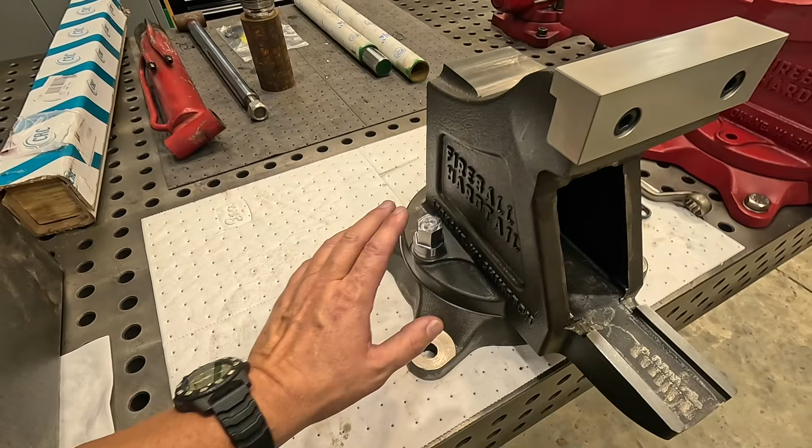Not machined out of the soft steel, but it's probably going to be either 17-4 stainless or possibly 4140. I just haven't decided yet. I'm putting a feeler out there—I want to know what you guys think, if there's any interest in buying a pair of them. And if so, we may go forward with making a small batch for some of you other hardtail vise owners out there.

All right guys, I think that's going to wrap up this week's Saturday Night Special video. I hope you had fun and enjoyed watching the footage I shared on the development and prototyping of these clamping bolts for the Hardtail Vise. I really like the way those look—I know that's personal preference, but that's what I was going for.

I'm sure there's all kinds of cool ways you can customize it for your own. You can even drill a hole in there if you wanted to put a handle in it, like this. But I didn't want that—I didn't want any extra features, just being able to come over with a wrench to tighten and loosen them.

I believe I spoke on this before, I can't remember, but this vise right here is a very special piece for me. I have no intentions of putting it through any hard work in any of my shops. It means a lot to me that Jason was so kind and wanted to work with me and collaborate on building a USA Hardtail vise. So this is just a special vise that I've enjoyed machining, building, and customizing.

We're going to continue to customize it—hopefully we'll have a cool paint job on it one day. This is just going to be like a showpiece for the shop, a centerpiece. It's not going to go through any hard, heavy work. That's what we have this one and the other vises I already own for—we'll use those for the heavy duty work.